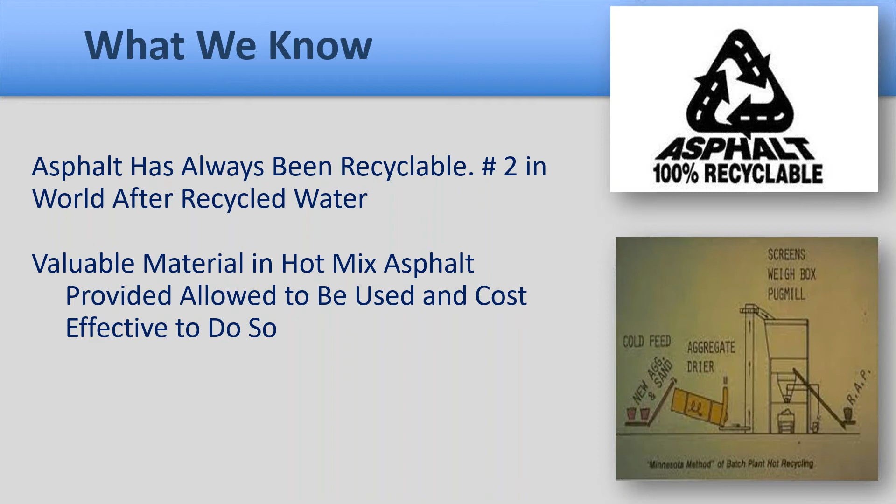Let's just talk about what we know. Asphalt has always been recyclable. In fact, it's the second most recycled material just behind water. We have used it for years, and typically it's been in hot mix applications, and it's a valuable material in hot mix asphalt. But sometimes it's limited on how much you can use, and sometimes it's not even cost effective to do so.

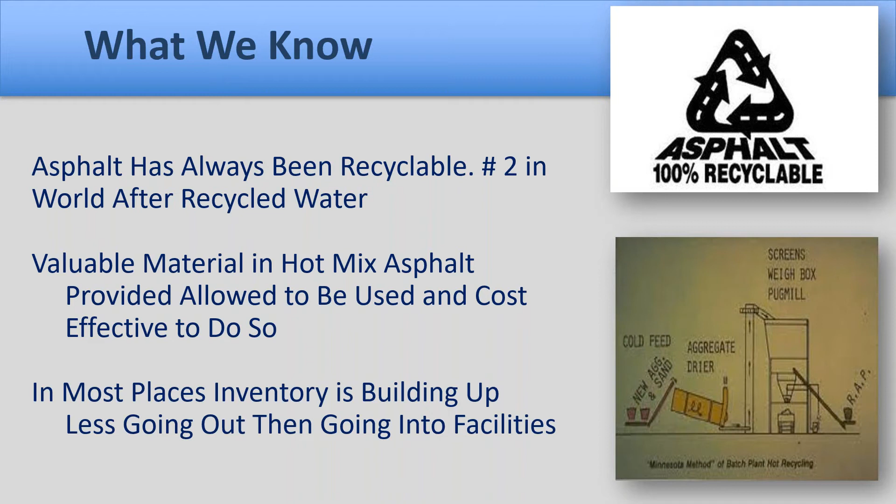So in a lot of places, we're taking in more material off the roadways than we're sending out. So we're building up stockpiles of RAP. But it's such a valuable material. We really don't want to squander virgin aggregates.

You can see this pit in an urban area near homes, not in my backyard, literally almost in this case. But RAP outperforms native aggregates in a lot of cases. Right now, in a lot of areas, aggregates are limited. And so some of the best aggregate was used in the pavement. So it's a valuable material.

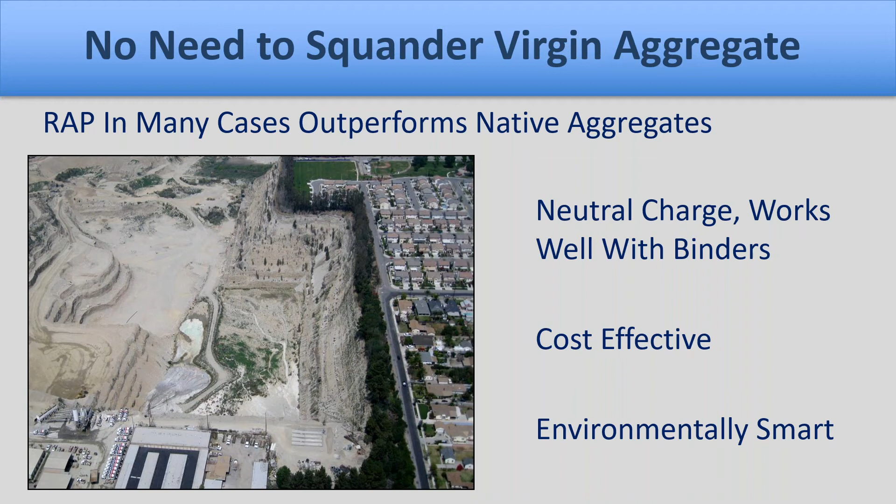RAP has a neutral charge. It works well with emulsions and asphalt. It's a very effective binder, very effective with a lot of different binders. It's cost effective, and obviously it's environmentally smart.

So when we talk about RAP uses in pavement preservation, we talk about mixes, and we talked a lot about that today - hot mix asphalt, using RAP in that, and cold central plant recycling, which Steve just talked about. But also you can use it as aggregate replacement in chip seals, slurry seals, microsurfacing, cape seals. I've done a lot of talking about that with the NPPC over the years about how you can use your RAP in pavement preservation, and there's an actual growing use in that.

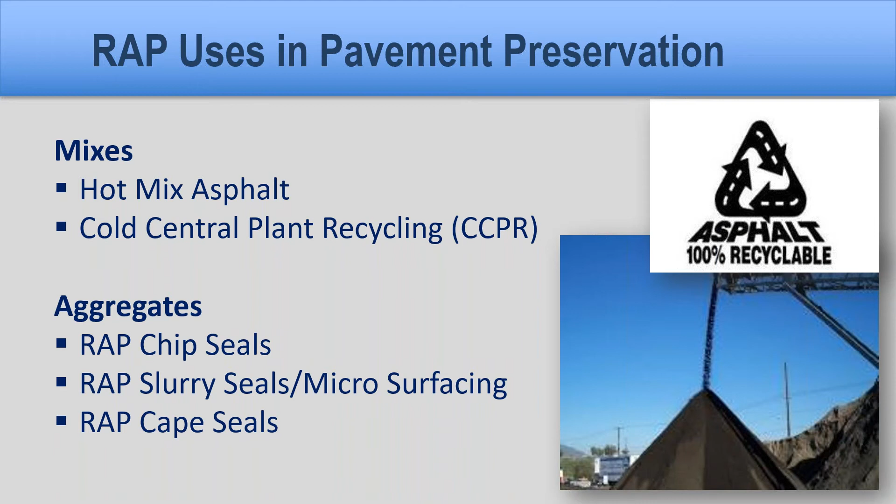So let's talk about really what's the value in the RAP. Obviously the aggregate, all the rock, the sand that's in there, but it's also the residual asphalt binder. And that's really the most governing factor - it's the binder that's in the RAP.

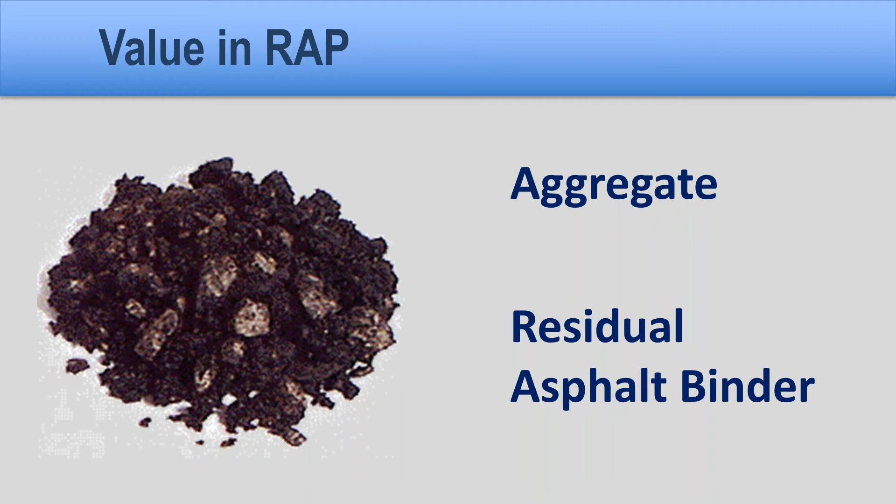So when we look at aggregate variations, we look at gradations of the material, but also gradations of the RAP versus gradations of the parent rock, or the extracted rock that's bound up in the asphalt. We look at the quality of the parent rock. Is it hard? Is it durable? Is it reactive? Is it absorptive? In many cases, the asphalt was used to prevent absorption. You have to use more asphalt in some less quality aggregate areas.

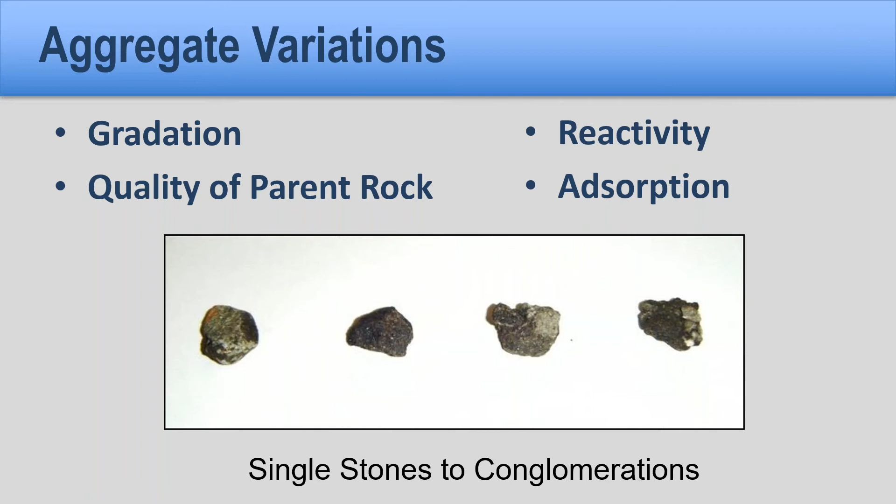And so when we're looking at RAP, we got to think about, are we looking at single stones to conglomerations? If you look at the picture, on the left is almost just a pure stone, the asphalt's been worn off. And then as we get more and more to the very right side, it's a conglomeration. Well, that's why it's so important to think about that residual asphalt binder.

And when we're looking at most areas, the RAP is likely to remain pretty consistent. The exceptions are, did somebody patch the roadway? Did they put in some solvent-bearing patches that we need to think about? Or did somebody do a removal replacement - did a lousy job and have to replace it with new asphalt, so it's a fresher asphalt? Did we change the base asphalt in the area, when we switched over from the AC grades and the AR grades to the performance grades? So consider the presence of different, unusually soft or hard existing binders, or even asphalt rubber, as these can affect the end use performance. And that's what we kind of want to focus on here.

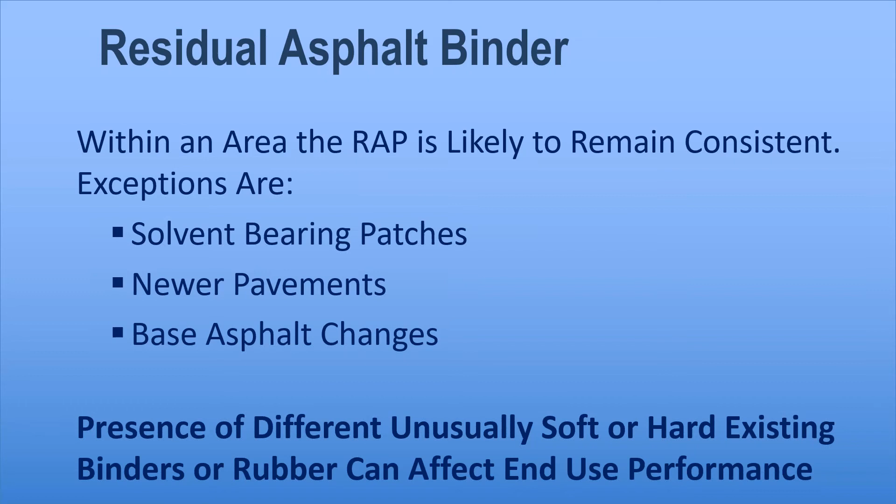So is the RAP gradation meaning it's acting like a black rock, or is the parent gradation, the existing gravel, sand, and aggregates that were used bound up in the asphalt? Will that fully soften to an extracted gradation?

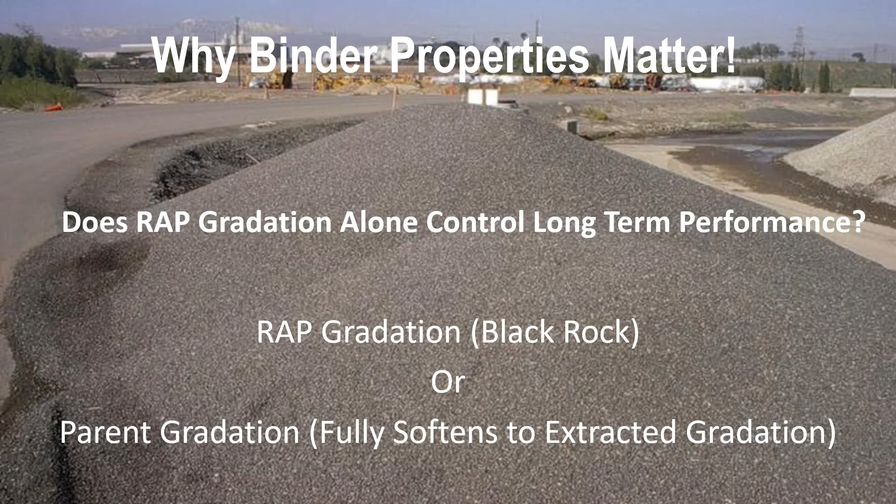This is probably the best way to do it, and it's a common thing being discussed throughout the country on hot recycling - how much diffusion occurs, how much of the asphalt on the RAP softens and goes to the parent gradation. In hot recycling, you're going to be acting closer to the parent gradation. In cold recycle, it kind of depends on that binder.

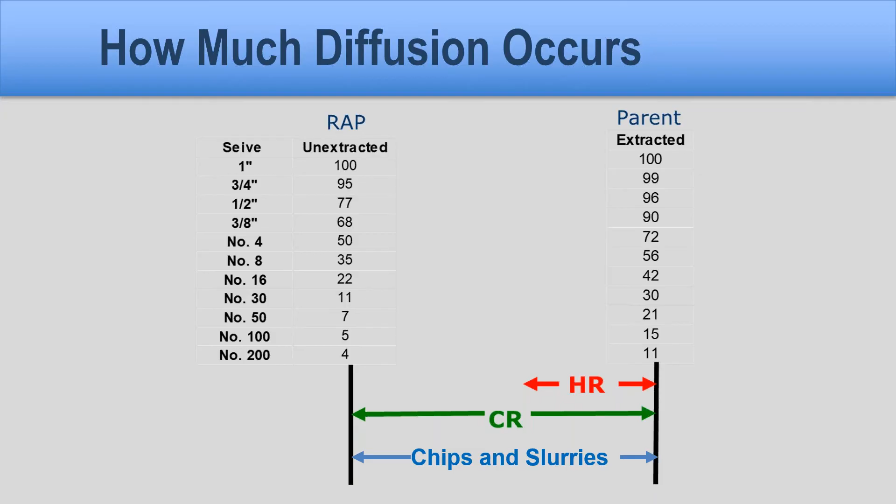The same with the chip seals and slurries. It may be a black rock because that asphalt's so hard, or is it going to soften up to get closer to the extracted gradations? This is before we really started paying attention.

Years ago, when we first started using RAP, we had a job - actually a cold recycle job - and you can see both sides of the road way different. That's because there were some asphalt patches done with a solvent-bearing patch that, when we recycled it, softened all the way to that parent gradation and caused a little rutting. This was a very isolated area, just one patch, and we removed and replaced it and moved on, whereas the rest of the road held up really well.

Well, now we focus on that. So let's talk about, for the rest of our presentation, the keys to good RAP management.

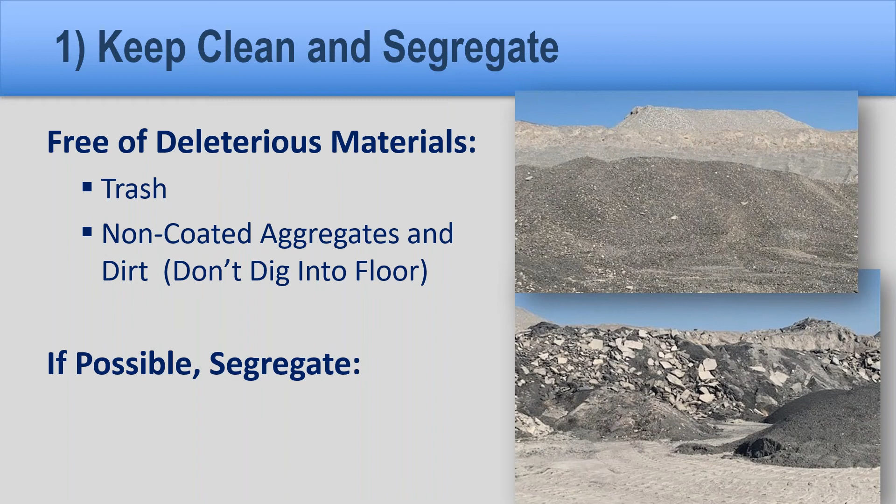When you're stockpiling - looking mostly at your facilities - keep clean and segregate if you have the room. Keep it free of deleterious materials, obviously trash, you don't want any of that in there. But also be careful: try not to, when digging into RAP, get into that floor, get into the dirt it's sitting on, because it's probably not on a paved surface. Make sure that loader operator doesn't dig down and grab a bunch of that dirt, mixing non-coated aggregates into your really valuable RAP.

The other thing is, if you can, segregate. And when I mean segregate - if you can't, and you have a certain type of RAP, keep it all together. But if you know that all of a sudden you've got maybe some asphalt rubber, or another product that's behaving a little different, segregate it based on the asphalt type if you can.

Also, if you look at the top picture, those are cold planings from a mill. The bottom is removal, chunky removals. We like to segregate those materials into pretty much those two piles, because we treat them a little bit differently in the process we're going to talk about.

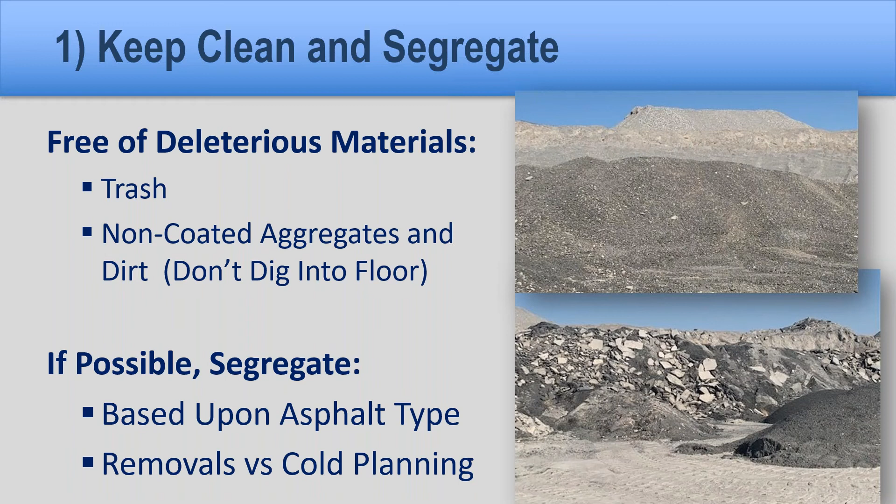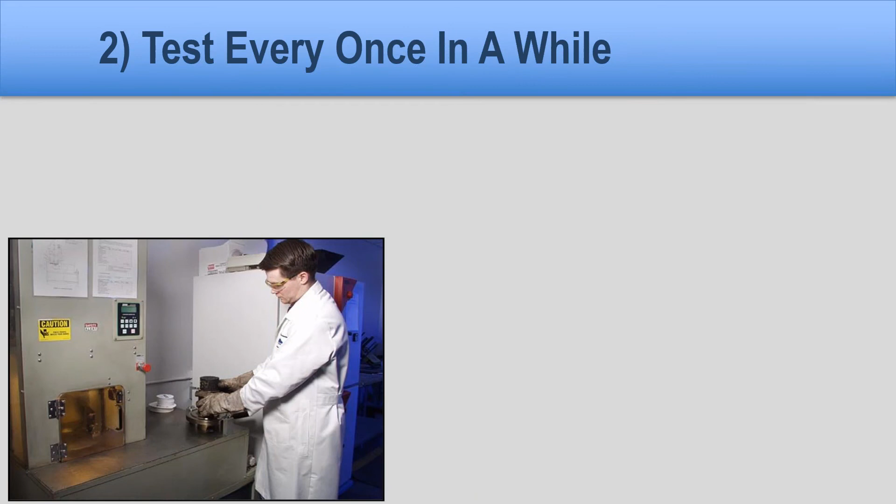Now, a lot of times you can't do that, okay? And I understand it - you're just shoving all this RAP together, and we're going to talk about that in a second here. But the other thing is, every once in a while, test your RAP.

Extract the binder and conduct an aggregate gradation. Recover the binder, and whether you like to base it on viscosity, penetration, or PG grading, every once in a while take that test and figure out what you've got. Or develop your own test to determine binder softening.

What I mean by that - and I'm not going to get into it - a lot of people say, hey, I crush the RAP down, I put it in a sample, or I put it in a Hamburg, and I run a certain test to see how much change in height occurs. There are a lot of different tests you can do, but you can get to the point where you can quickly determine: this binder is going to soften up if it gets hot, it's going to have a lot of activity in it, or it's not going to soften - it's going to act like a black rock. Especially do this if you don't know the sources or have new sources.

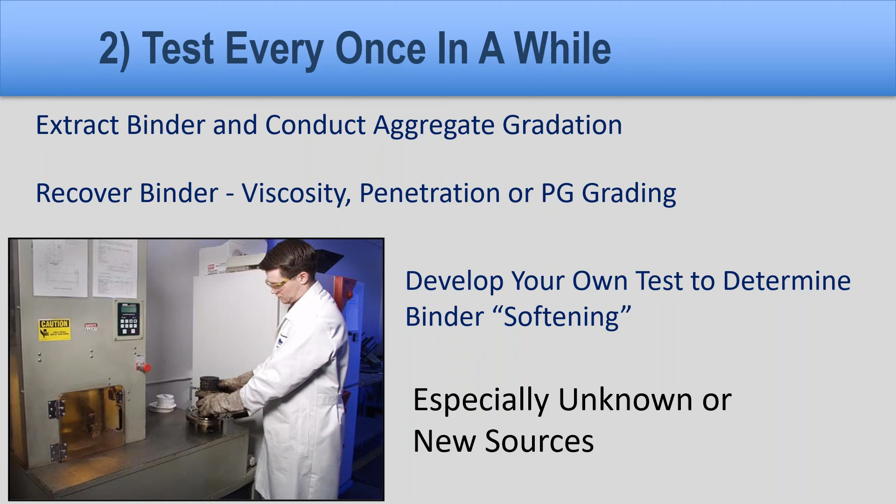I'm not saying you need a big, long quality system like you do for a lot of aggregates, but test it every once in a while. Make sure you're getting consistency in your RAP. The reality, though, is with a lot of this RAP, you can get away with a lot if you just homogenize, homogenize, homogenize.

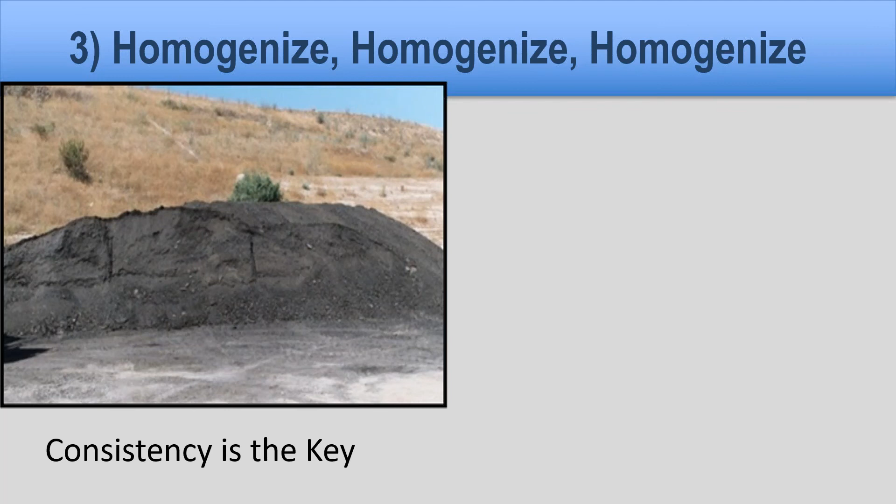Consistency in your pile is the key. What I mean by that is when you get new loads, whether you know what it is or not, blend it with your existing pile at different locations. Don't put it in one place, because when you process it, you're going to get all that particular material. Put it all over your piles, especially on big piles. Mix it in at different levels of your pile.

And then when you take your pile to process it, take it from different parts of the pile and blend when processing. It doesn't take but a couple of minutes to take a pile from one area, throw it with a pile from another part, blend them together before processing. So you're homogenizing when you put the pile in place, you're homogenizing when you take it out.

And finally when you're loading your trucks and making all your processes, that should be done with any aggregate facility. Take your sample, take your loads from different parts of the pile and blend them in the truck. So again, homogenize, homogenize, homogenize.

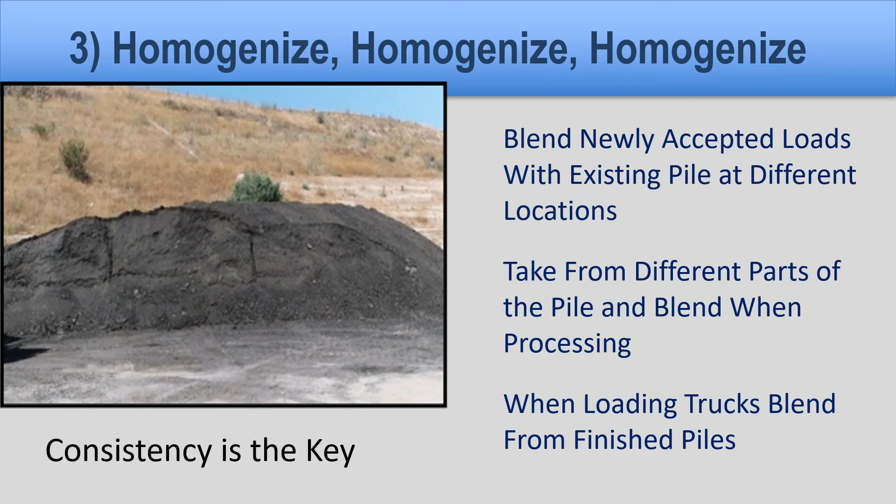That makes a much more consistent product. And Steve talked about it, fractionate if you can. So when you make your products, blend them into different sizes so that when you add them together, you can get a much more consistent mix.

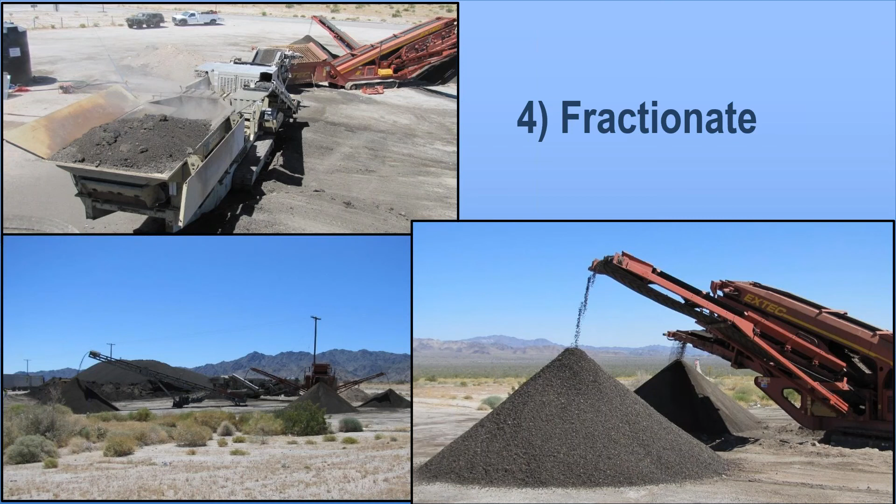The hot mix guys started learning this years ago. If they just grab the product and put it in, they didn't get as much consistency. If they made it into two piles and then blended it back in, that helped. Fractionate if you can and have the room, because when you do that, you can recombine it for better gradation.

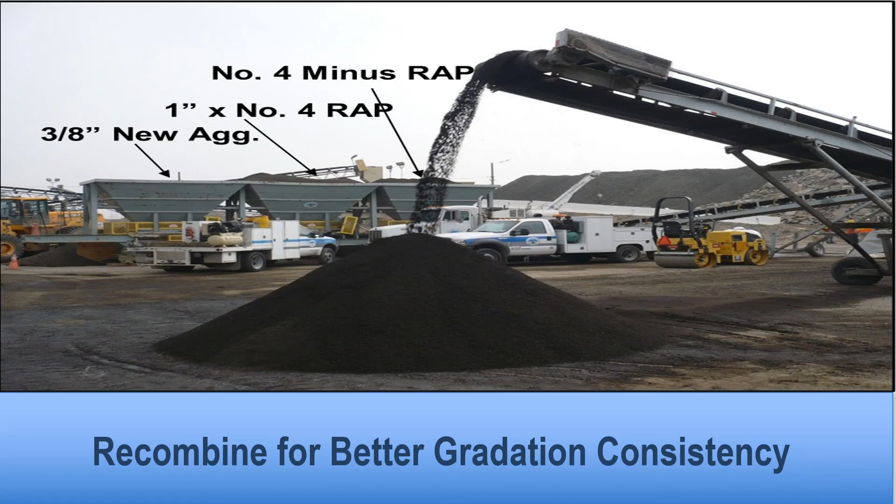This is a cold central plant. Steve talked about it, but here's where we use a 3-bin feeder. We actually had 2 sources of reclaimed asphalt. At one point we were adding a little bit of new aggregate to give a little bit more structure, because we were afraid that the reclaimed asphalt was going to soften up a little too much.

So we gave it uncoated aggregate to absorb some of that asphalt and give a better overall performance. One of the keys when you're doing your reclaimed asphalt, the value is the asphalt on the rock. If you can keep it coated, you have so much less issues. So screen before crushing, and that's why we keep our chunked asphalt away from our millings. Our millings, when they mill it, they actually don't tear the rock so much, they tear the asphalt, and it gives you really nice coated rock.

So what we do is we screen. This is one of our aggregate processing facilities. It goes into the feed hopper, and we screen off everything less than 3 inches. Then we put them over 2 fractionating screens, depending on what we make. We're trying to screen more than crush, rather than just crush directly. Only the oversized goes into crushing, and then it goes through the loop again.

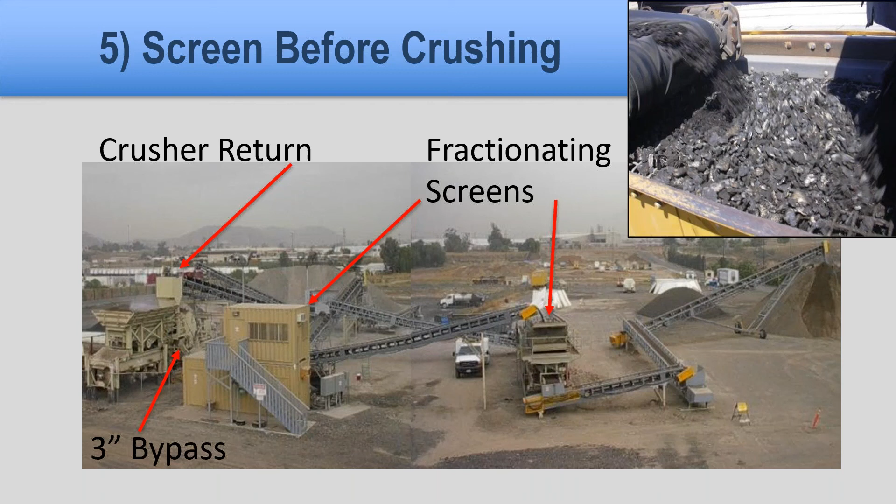Because we don't want to open up those faces if we can, or change that parent gradation if we have to. The reason is more coated rock means less activity and absorption. When I say activity, when you're using emulsions in chip seals, slurry seals, or microsurfacing, if you have fresh crushed faces, it may react with the emulsion differently than if the rock's been sitting for a while and isn't a fresh face.

That's why just screening it more, we have more coated rock. You can see the rock in this picture that it's got a little bit of asphalt all over it, and that's the value. The other benefit is absorption. I get a lot of times people saying, hey, we're cold in place recycling, we had absorptive aggregates. Well, we find we don't have to treat it so much when we cold recycle it, because the rock's mostly coated with asphalt already and that prevents absorption.

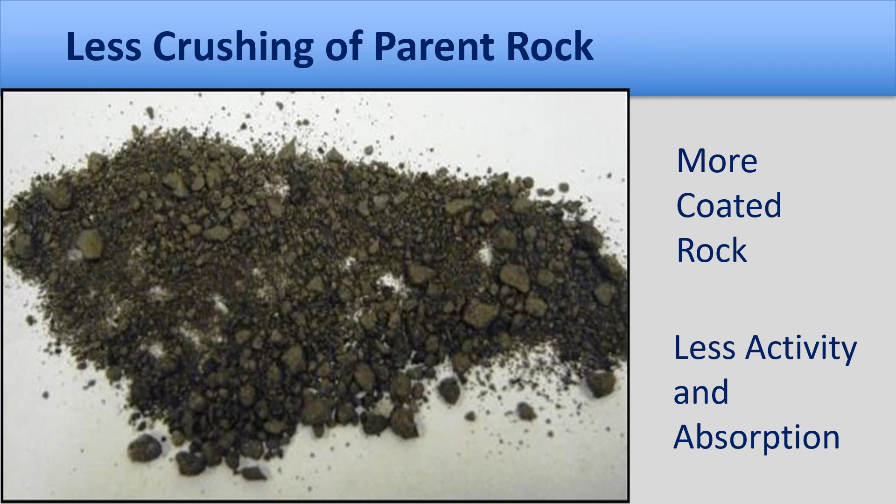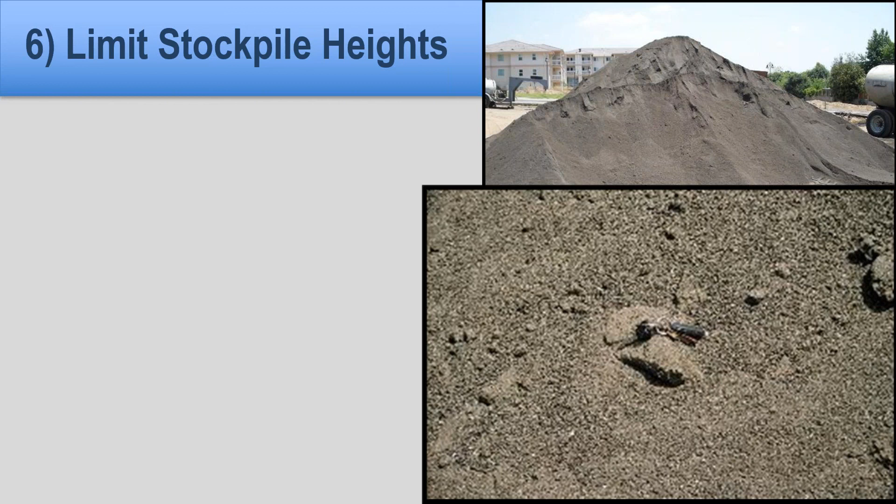So let's not open crushed faces if we don't have to. And this is one of the biggest challenges depending on space, but it's definitely not a challenge if you're making material: limit your stockpile heights.

Time, temperature, and pressure cause these RAP piles to consolidate in the middle, and you can see this clumping. We don't have this big issue with RAP chip because of its openness, but when we make slurry material, we typically make it fresh to take to the site, because if we let it sit long enough, we get little chunks developing in the center. If we have to, especially before we reload it, we may just run it over a screen.

They break up pretty easily, or we just smash them out in the field. But if you get big RAP stockpile heights at your site, say 30, 40 feet, in the middle of it you're going to have all these millings blend together. So you may have to break those up with a dozer or something.

Same thing with cold central plant cold mix. If you make a mix that you're going to let sit for a couple of days, the higher you make it, the more you've got that problem with it sticking in the middle. So try to limit your stockpile heights.

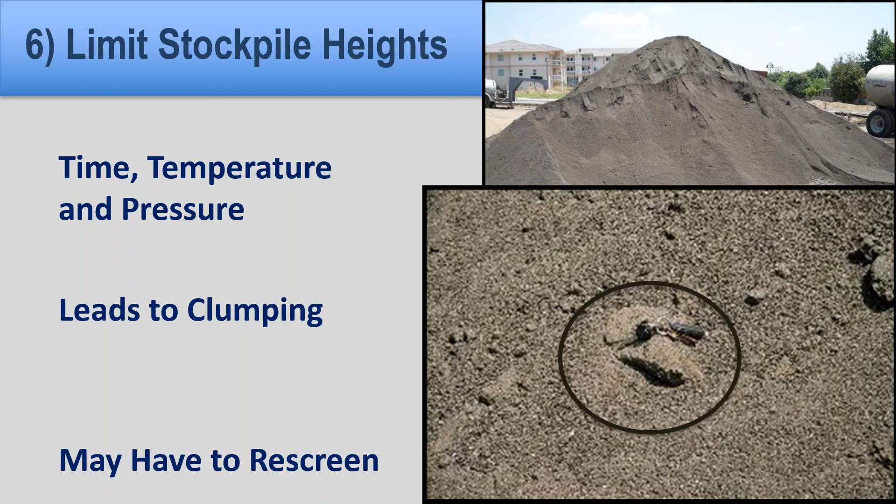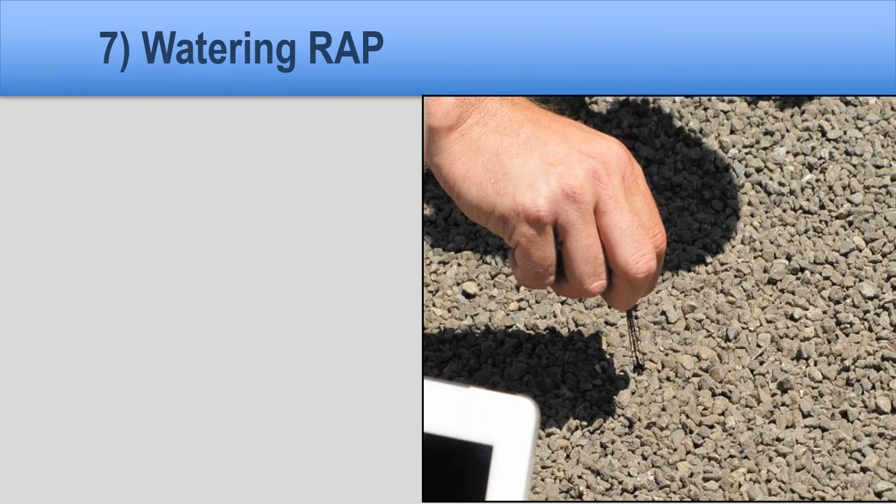And the other is, when do you use water, when do you not use water. This is a chip seal that was done with a highly polymer-modified emulsion. You can just see how much adhesion it has to it.

RAP has a dusty appearance. A lot of times in aggregate facilities, you want to get rid of that dust. Well, that dust is valuable in RAP—it's actually asphalt. Don't wash your RAP. You do need to keep that material dusty, you may have to limit it for airborne concerns, but keep that asphalt there.

But one thing we do is wet it, and Jason talked about that—breaking the surface tension of the water, and getting the ability for the emulsion to coat better. With emulsions, we wet our RAP before use for cold central plant recycling, chip seals, and slurries.

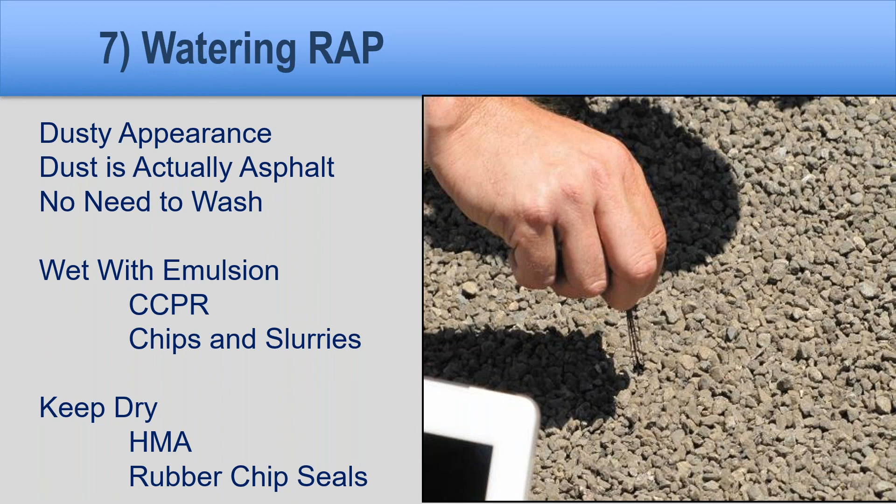On the other hand, we try to keep it as dry as possible if we're going to use it in hot mix asphalt, or we're using hot rubber chip seals. We'll keep it dry. So consider when you're going to water your RAP and when you're going to keep it dry for these applications. A recap to good RAP management:

One, keep clean and segregate if you have the room. By far one of the best controls. If not, we're going to manage it differently.

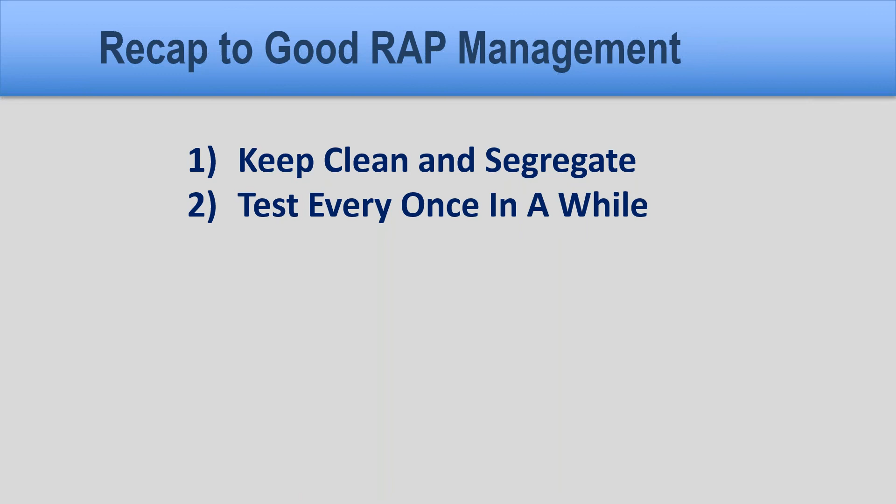Test it every once in a while. Simple test, whatever you need to do, just make sure you know the difference if you're getting a binder that may give you a problem. But homogenize, keep your RAP blended.

This is one of the biggest keys: always keep your pile blended. Blend in new materials at different parts. Keep it so it's consistent material.

Fractionate if you can. Get it to the point where different sizes recombined make better products in the long run. Screen before crushing—try to crush as little as you can. Just size the rock from screening and then crush what you have to.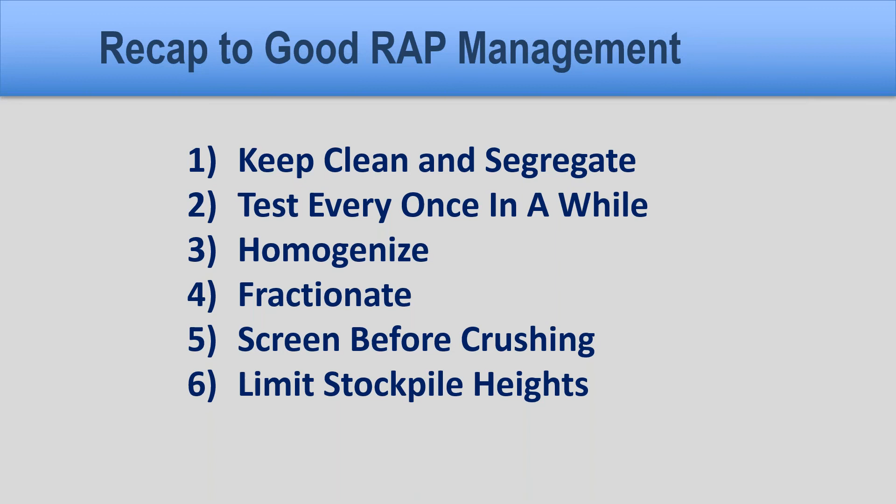Limit stockpile heights. Make sure that you understand if you're going to keep it a long time, temperature and pressure are all going to cause consolidation in the middle. So if you can limit those heights or keep it stockpiled not as long, you're going to have fewer issues with that. And then use the water as needed.

Emulsions, cold central plant recycling, chip seals, slurry seals—moisten it, keep it moist. And keep it dry for HMA and for hot asphalt rubber.

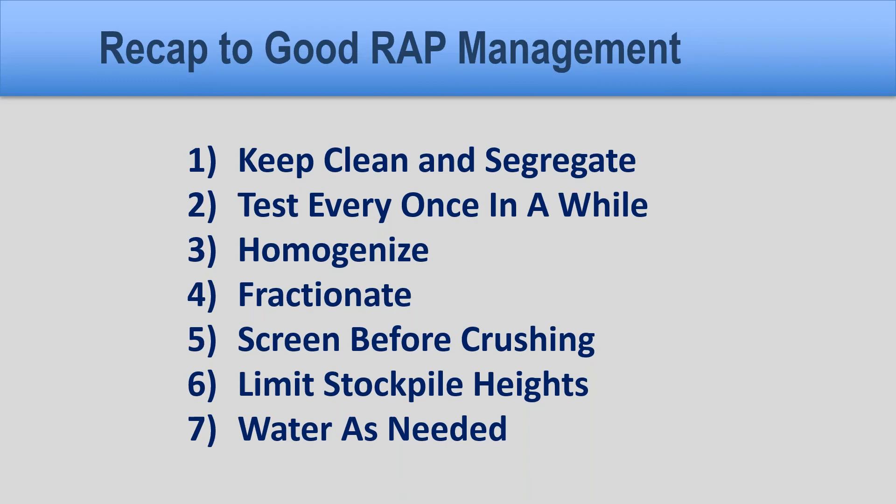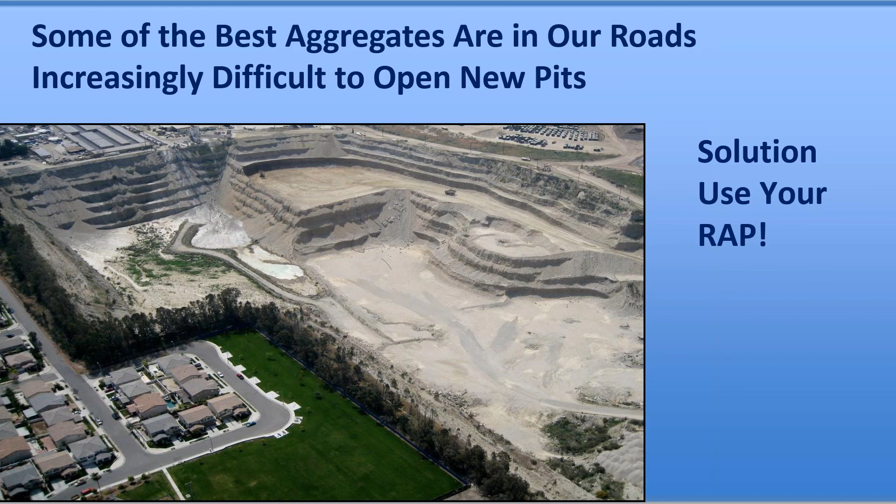Some of our best aggregates are on our roads, and it's getting harder and harder to open pits. Use your RAP—it's such a valuable commodity, and if you use it smartly, it's a money maker and it's good for the environment. But make sure you manage it wisely.

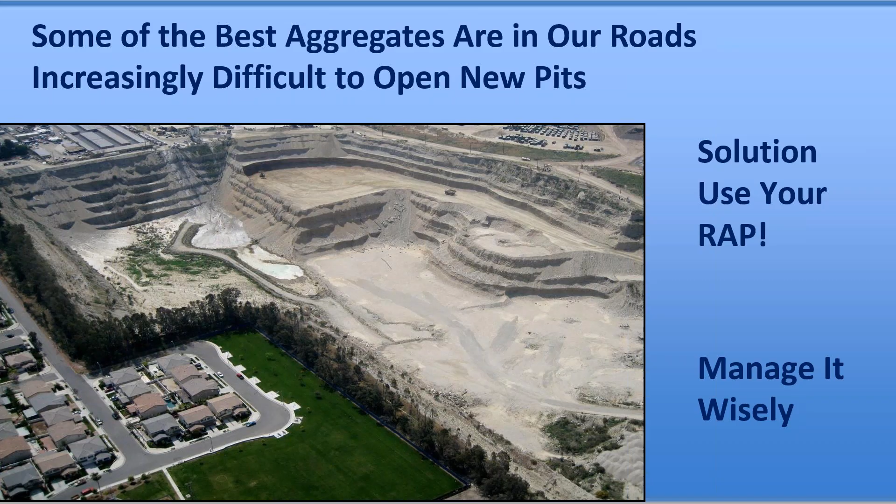Don't just think RAP is RAP is RAP. If you just use a little care, the quality can be so much better. With that, I thank you, and I think we're going to take some questions, but I'm going to turn it back over to Kevin.